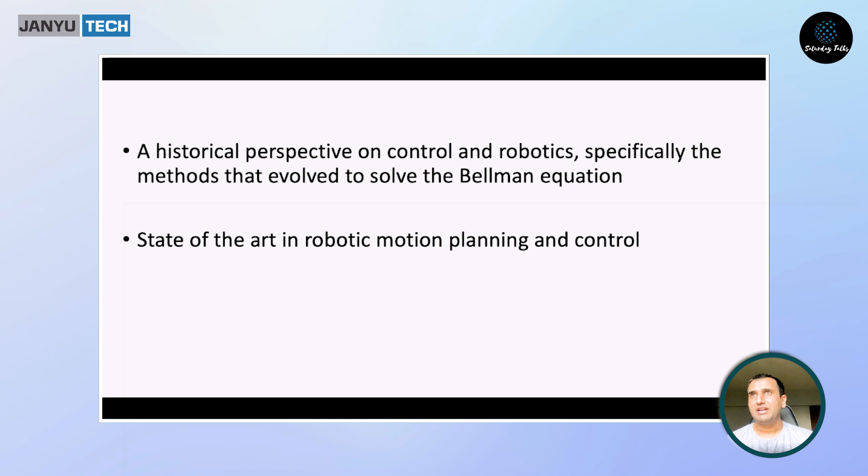For the rest of the talk, let's keep it informal. I'll walk through the slides, and if you have any questions, just ask me. The only issue is my screen is in full screen mode, so I cannot see if anybody raises their hand, so please feel free to stop me and ask questions. I may not be able to answer all of these since these are very deep waters, and there are areas I'm aware of and some that I'm not. Where I'm not, I'll tell you as much and direct you to the appropriate references. So with that, let's move along.

Let me start by telling you a bit of the history of how controls and robotics have been doing for maybe the past 50 years or so. With that, I hope you'll understand why the Bellman equation is now suddenly so front and center. In fact, more than the equation, I want you to think of the Bellman equation as a way of thinking about problems, and that will become apparent very soon.

The history of control, specifically what we call optimal control, really dates back to the 1940s with the work of von Neumann on what we now call game theory. But that work really laid the foundations for what we also now call dynamic programming. A lot of these ideas really started coming together in the 1950s. 1956 was really a pivotal year because four major developments happened at that point, which had far-reaching impacts on not just how we solve control problems, but importantly, how we think about control problems.

The first I've mentioned here, the Pontryagin principle and Bellman equation, relate very much to optimal control. Pontryagin's principle is a way to solve optimal control problems. In some sense, it is not the same as the Bellman equation, but there are some overlaps, obviously, because they both try to solve the same problem. Both of these were published in 1956, to be precise, for the very first time.

Now, for those of you interested in AI, you'd also know that this was the year in which the Dartmouth workshop took place, in which the field of AI was to some extent formally defined, as in people got together and defined what kind of problems or objectives would fall under the ambit of AI.

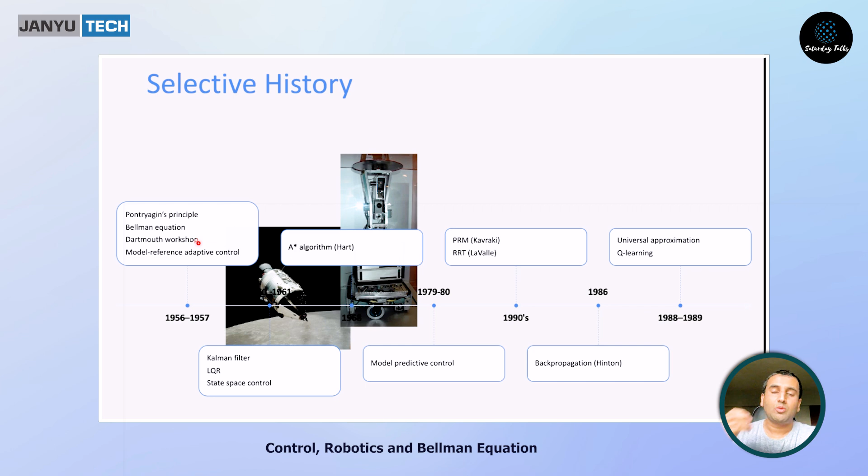Problems like planning, perception, decision making, and robotic path planning were formulated broadly as areas of interest to the field of artificial intelligence.

The last development that happened in '56, which is of particular interest to aerospace engineers, is model reference adaptive control.

The 50s was a time when combat airplanes started flying supersonic. The designs became more agile, and as the wings became smaller and the planes started becoming unstable, handling became a challenge for pilots. So it was felt you had to have a uniform set of handling standards, which came about in the 1940s in the form of what we now call handling qualities. But you also needed a control law or technique which could smooth out differences between different airplanes and different flight regimes, keeping a uniform handling standard across the flight envelope.

That idea of uniformity was captured in this reference model, and that gave rise to MRAC. These things happened in 1956 itself.

This was also a time when Rudolf Kalman was active as a researcher, and in 1960 and 1961 he published his now legendary papers - three papers in fact. There was a paper on what we call Kalman filters first, and a paper on Kalman-Bucy filters, which are not actually called Kalman filters because they differ in how you add measurement noise to the system.

Another interesting development was linear quadratic regulators, or LQR. I'll tell you how LQR came about as a result of Kalman's attempt to prove something about the Kalman filter - it's not like he was thinking of a control method, but he realized there's a way to prove how his filter works if he thinks of it as a control problem. That gave rise to LQR, and it's actually tied very closely to the Bellman equation.

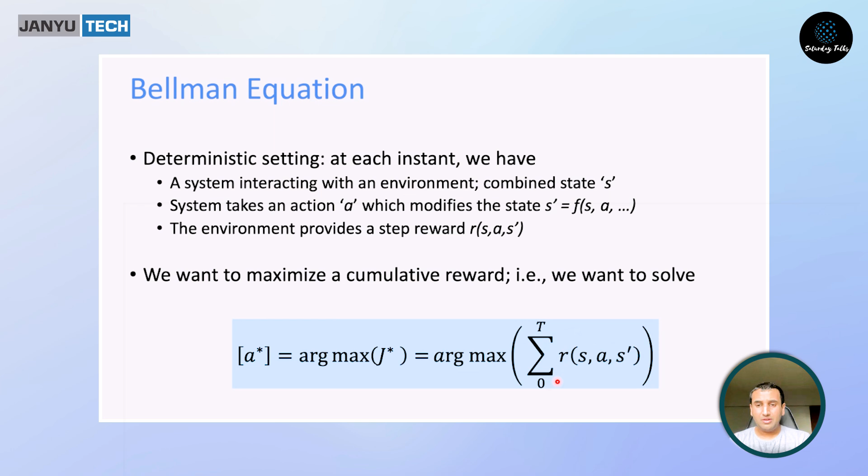What you actually want to achieve in all of these things is to maximize what you accrue over a long period of time, and that's what's written at the bottom. Starting from the very right, you sum rewards over a period of time from 0 to t. You want to maximize this total reward — you don't care about the step reward alone.

There are times when step rewards may not be great, but this entire reward has to be maximized. If you're a policymaker, what you care about is not what this reward is going to look like, but what actions you need to take to maximize this reward. Therefore we say argmax. We sometimes denote this reward compactly as J star, and what you want to solve for is the series of actions A star that are going to get you the highest possible reward.

This is a problem that you want to solve in any kind of practical setting. To go back to that example with the RBI, if they could, they would want to plan their sequence of interest rates for the next 5 years and bring some predictability into the market. In engineering, if a robot has to go from point A to point B, it's going to want to take actions that minimize energy loss and get it to that point in the minimal possible time. So it's the same set of problems being solved in all these different disciplines, and you see how nicely it already starts looking like a very unifying framework.

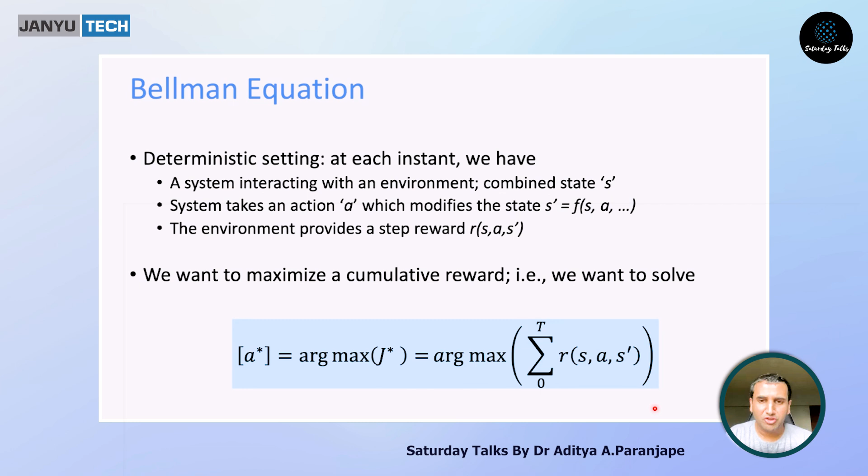All right, so let's move on. We're not at the Bellman equation yet, but this is the setting for the Bellman equation. Now there are some nice ideas here that help you actually get to the Bellman equation.

So let's look at just the cumulative reward now. Don't worry about the action just yet. Let's look at the reward that you get by taking some series of actions A from time 0 to t. Now, one key principle that was actually obtained not just by Bellman, but even by von Neumann before Bellman.

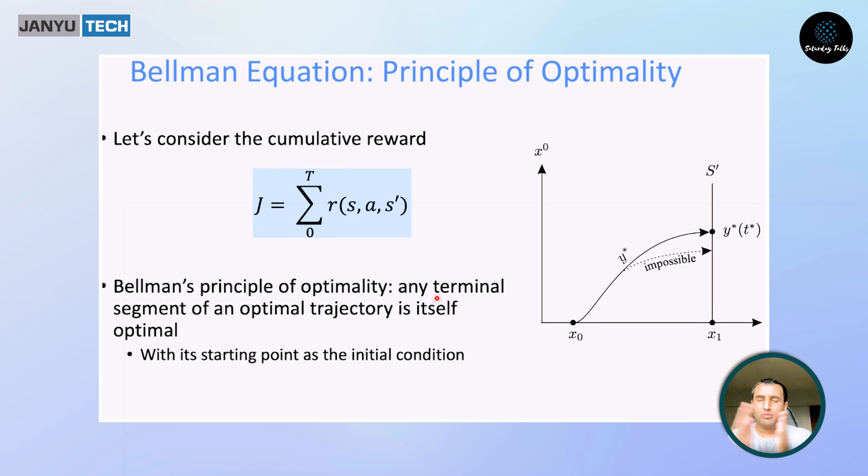So the way to think about it is, if I have an optimal trajectory, then between any 2 points on that trajectory, solving the Bellman equation entails solving this equation for all possible states. If you are thinking of this as a robotics engineer - I have a robot starting at some point, I have a terminal state in mind, and I'm going to solve the Bellman equation in its most native form - well, you're not going to solve for one initial condition. You're going to solve for every possible initial condition, and you're just going to cherry pick that one solution that applies to you.

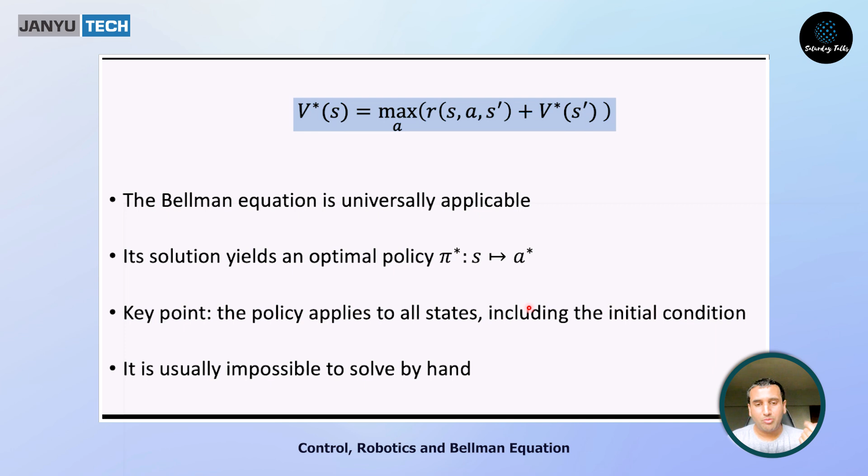And that already shows you that maybe this is an expensive process. It's also an inefficient process to solve this equation. So what you will see from here on, when we talk about robotics and control, is how methods evolve to solve this equation efficiently. In robotics particularly, initial conditions are typically known - you don't want to have to deal with every conceivable state. In control, the intractability is a problem, so you have to find ways to deal with this equation.

So that's what I'm going to show you about control in robotics. And as I told you earlier, this is not just an equation, it's an idea, it's a concept, and it's had a significant impact on how these two fields evolved, starting in the late 50s. All right, let's look at robotics now. I have a few slides on robotics, a few slides on control, and then I'll wrap it up. So it's maybe 10 more slides to go approximately.

In robotics, one of the key problems we deal with is motion planning. You will encounter both phrases, path planning and motion planning. The technical difference is that in path planning you're only worried about the physical path, the X, Y, Z coordinates. In motion planning, it goes beyond that to the trajectory, and really to every state of interest. So if it's an airplane or a satellite, even the rotational motion would be included in motion planning, whereas with path planning you don't care about those things. You don't want to solve for it, you just hope everything falls into place when you solve for the path.

The other important point is that the initial point is usually specified. Remember we talked about an optimal policy, and when you derive the optimal policy, even for a fixed terminal point, you derive a policy that applies to every possible state, which means whatever you solve for has to be solved for every possible state. You don't want to do that in a robotic setting. You don't have that kind of time or resources when using algorithms in real time. So you want to solve something that looks like the Bellman equation, but without all the complexity of solving for the entire state space.

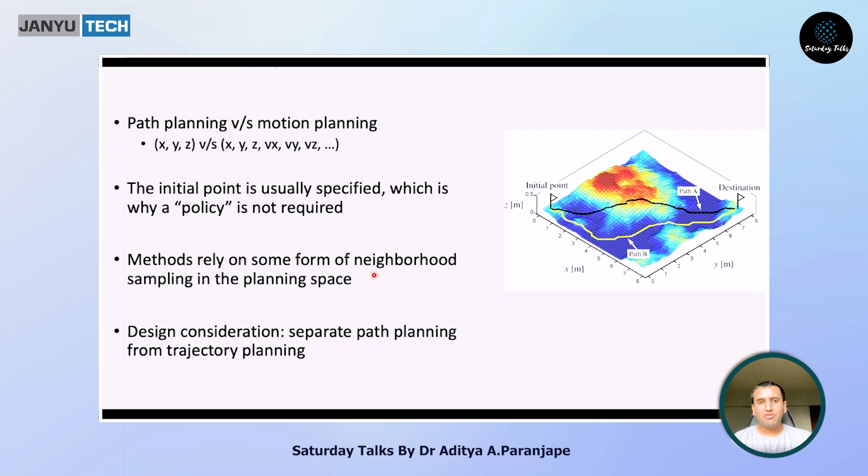So what's happened in robotics is that methods evolved which rely on some form of neighborhood sampling. If you're at some point, say the initial point, you sample the neighboring areas, you see what cost it incurs to get to those points, and you use a clever way to get an approximation for that cost to go. I'll show you exactly how that's done in A* in just a moment. These sampling-based methods evolved in robotics because of this idea of the initial point being more or less fixed. They're rarely used outside of robotics, but it's a nice way to solve Bellman's equation.

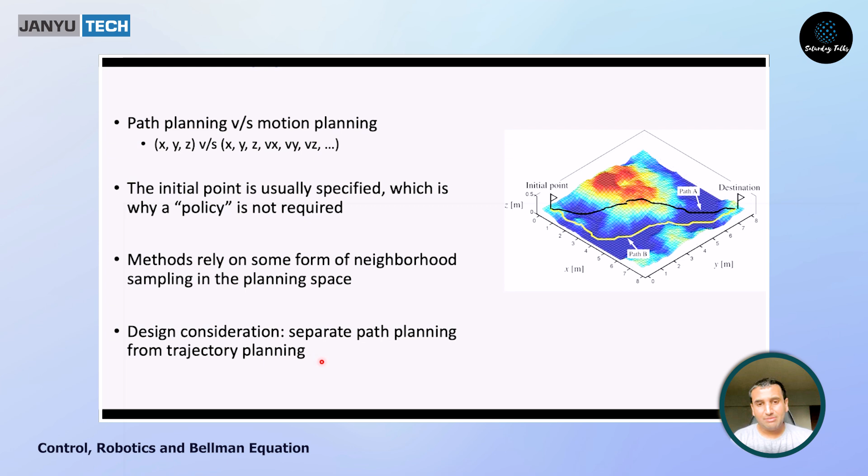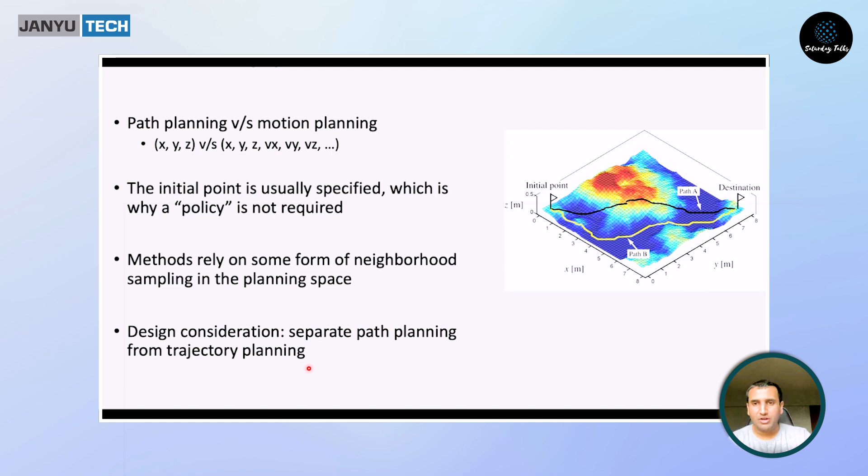For those of you who work in robotics, I know Janyu has a significant portfolio here, one consideration is whether you want to separate path planning from motion or trajectory planning. That's of interest because the methods I'm going to tell you about evolved to solve the big problem with path and trajectory planning together. But I'll show you examples where we separated these two, allowing trajectory planning to happen in a completely independent setup from path planning. Path planning was solved using Bellman's equation, but for trajectories we didn't do anything—we used a straightforward open loop stitching approach that you will soon see.

Now, I told you earlier about A*, and A* really evolved to solve Bellman's equation directly. So what you see in this sketch is A* in action. Let's just pause it for a minute if possible. Okay, it's not letting me pause—one moment. All right, but what it's doing is this: suppose you have a gridded world as shown in this video.

From every point, there are areas you can get to—those are the neighboring cells. There are some no-go areas which are black. Every hop comes at a price, and in this kind of world that price is uniform. You want to get from the starting point here to maybe the goal somewhere here in the minimal possible time, and you clearly see how this equation comes into being.

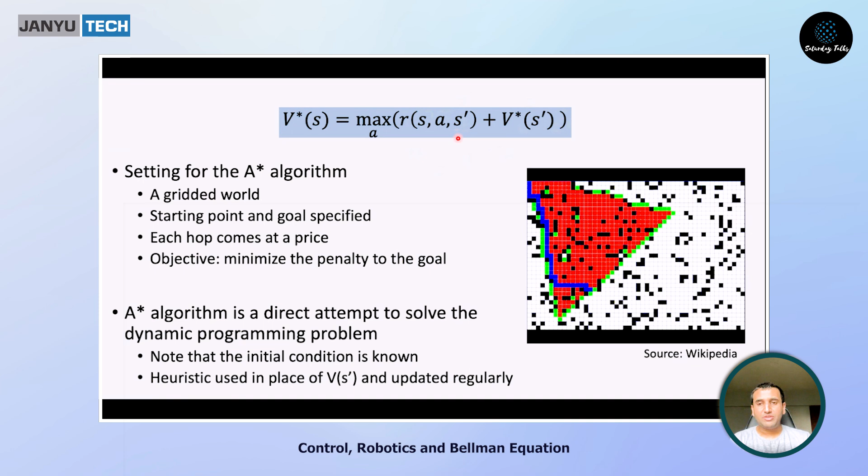The trouble is, when you start at a state S and take a hop, you don't know this value because you don't know the value function at all in this case—all you know is R. So what A* did was come up with something called a heuristic. Those of you who've worked on A* know this, that we create a heuristic function that approximates V.

As you take a step forward, you update the heuristic for the state you've just traversed at every parent state of that state. So if, after a few hops, I end up in one of these states, I update V* of that state, and using the same formula, I go back and update V* for every state I've visited previously. I keep doing this until I get to the goal state, and once I'm at the goal state, its own V* is 0. Because of this approach, I've actually been updating V* for every state.

That's it. I have V* now, and I know my optimal path as a result. This was the first algorithm, developed in 1968, and that robot I showed you earlier, Shakey, actually used this algorithm to traverse a gridded world. So the very first systematic motion planning algorithm came about as an approximate way to solve Bellman's equation.

Now, while A star is quite good, the idea that you have a gridded world can be a restriction. Our worlds are not gridded. I mean, we can have road maps, but our real world is not gridded. So that gave rise to the idea of what are called probabilistic road maps. The idea was, how do you extend A star to continuous spaces?

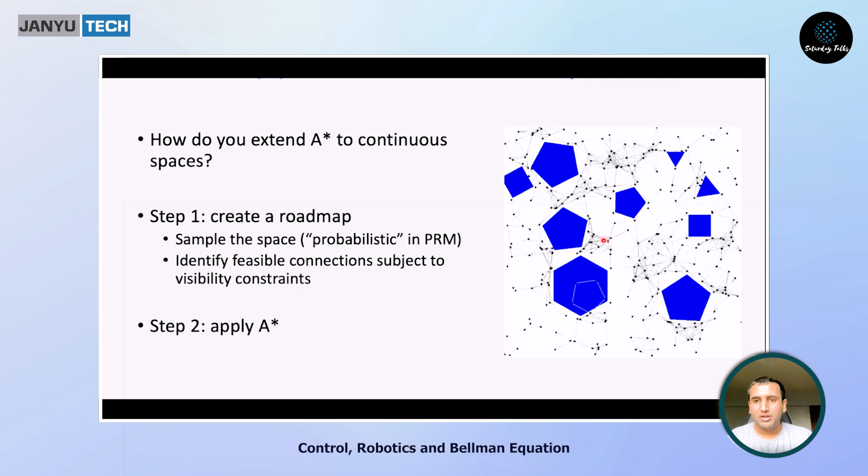If, on the other hand, you have applications like Uber, where you go in a city where the roadmap already exists, it's perfectly fine to use PRM — it's very powerful. But if you have a robot that's just asking for a route between one point and another, a single query with no guarantee such a thing will be used again, then PRM and even A star are both overkill.

So that leads us to the next method known as RRT, or rapidly exploring random trees. It's a single query algorithm, meaning you give it an initial condition once and tell it where you want to go once. It samples the environment in real time, looks for feasible connections, and builds a very special graph.

What you saw up until now was a generic graph with no structure to it. This one builds a tree, which means that if my tree ends up on the goal node, all I have to do is start from that goal and go back down the tree. There are no cycles in trees — there's a single path from the goal to the initial condition, and that's it. It has been solved for; nothing else remains to be done.

So RRT has actually evolved into a fairly strong approach. It's very practicable as well, and in fact it is the state of the art. Let me show you an example that comes from our own research — these examples are drawn from our work.

We were able to implement RRT online on a computer that sat on an airplane — a Pixhawk board with a minimal computational architecture — and we were able to implement it. Let me see if I can play this video for you; one moment, I'll probably need to use my pointer. You can look at the kind of maneuvers the airplane is doing — these are very aggressive maneuvers.

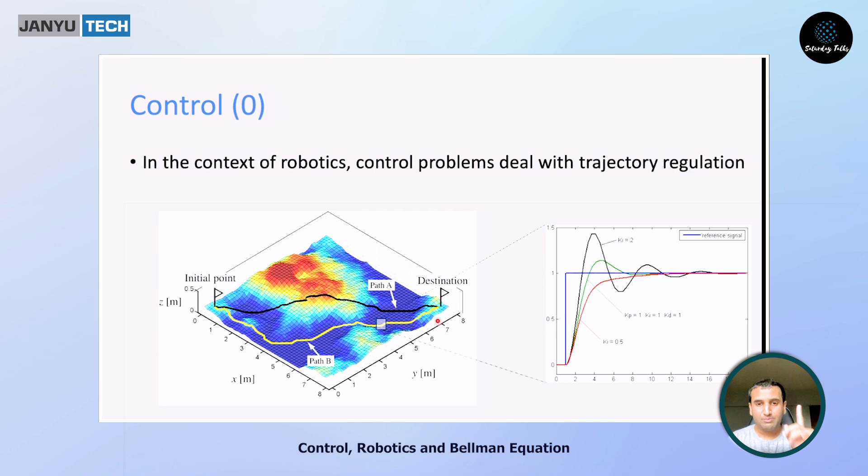Now, the reason why I mentioned this is because although we talk about the Bellman equation, we talk about long-term problems, the way I've explained the control problem, it appears to be a relatively short-term problem, right? But despite this being a short-term problem, we still use something like Bellman's equation, because Bellman's equation gives us a policy. So although control problems may have objectives that shift from point to point, my policy doesn't have to shift. Unlike the planning problems you saw in robotics, where we didn't care for a policy—we cared for one specific solution—in control, we care for a policy, at least ideally.

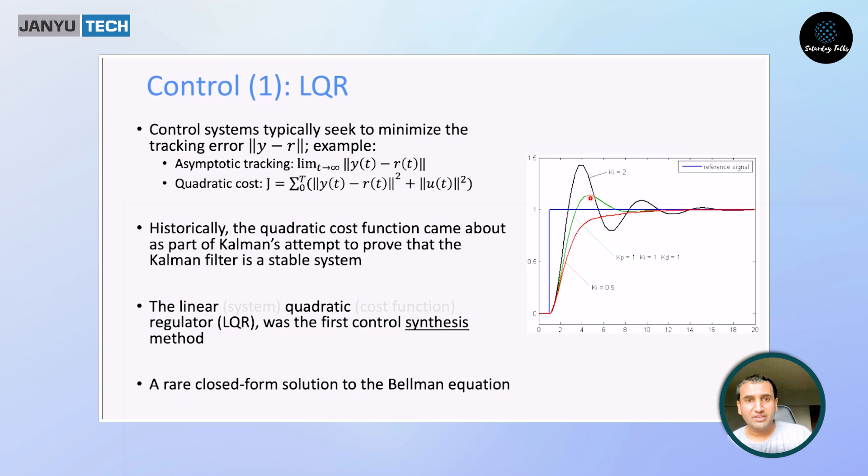So in control, as I told you earlier, our typical goal is minimizing some tracking error, the difference between the output and some reference signal. More often than not, what we care about is this thing called asymptotic tracking. You start with whatever error you have initially, and as you see in this figure, you hope that it dies down gradually. In piloted flight, as the question earlier hinted, these characteristics become important—you don't just want the error to die down, you want these transient characteristics to be chosen correctly.

And the optimal control formulation that we've seen so far, in terms of the reward, does nothing to deal with the handling at all.

As I told you, when Kalman was working on Kalman filters, he realized there was some reason why you might want to use LQR, and in fact he devised it as a solution to a problem. So you have this kind of quadratic cost: the tracking error squared plus the cost of the control input squared, and you want to minimize this quadratic cost. Typically these two terms are weighted against each other, so the weights are not exactly one as shown here.

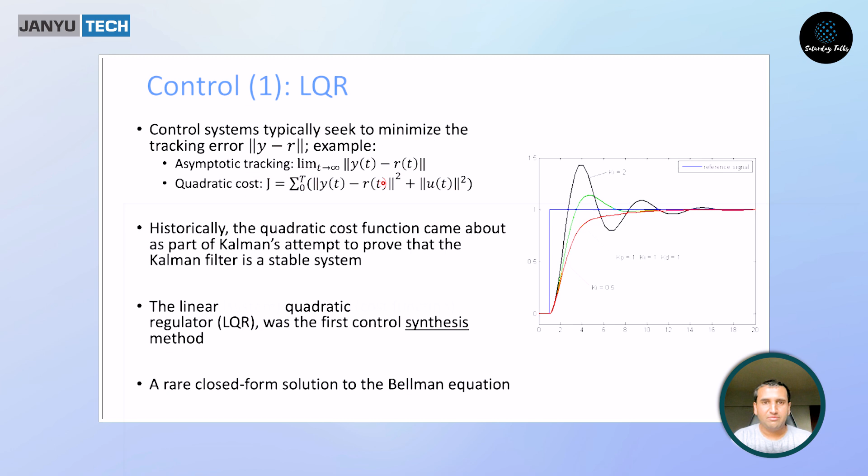Now, the trouble with LQR is it only deals with linear systems and quadratic costs, and it gives you a solution by hand. What happens if you don't have a linear system or your cost is not quadratic? You can still use an exact solution for very trivial cases, but generally it doesn't work. That's when MPC was devised towards the end of the 70s by the oil and gas industry.

If possible, you update information about the system. So if you have information from your sensors about the state of the system—for example, the temperature in your column distillation units, about pressure in certain areas, if something has failed—you can update it at the start of the prediction horizon and then compute this solution and let it run only for some time. You don't run through the entire horizon; you run through a part of it, typically a third or a half, and then you repeat this process, continuing ad infinitum.

Now, what have you done? The first thing is that you've made the problem computationally tractable. Instead of solving the Bellman equation over a long time horizon, you're solving it over very short time horizons instead. The second thing you've done is given yourself the ability to deal with uncertainties in the model.

The trouble is the Bellman equation requires that you know the model—there's this function f which maps your current state to the future state. We never saw it explicitly in the Bellman equation, but you need to know it to solve it in some ways. MPC took away some of that pressure because it says, well, I only need short-term knowledge, which I can safely assume I have. I don't need to know what's happening in the long run. So it allowed your procedure to become adaptive in nature.

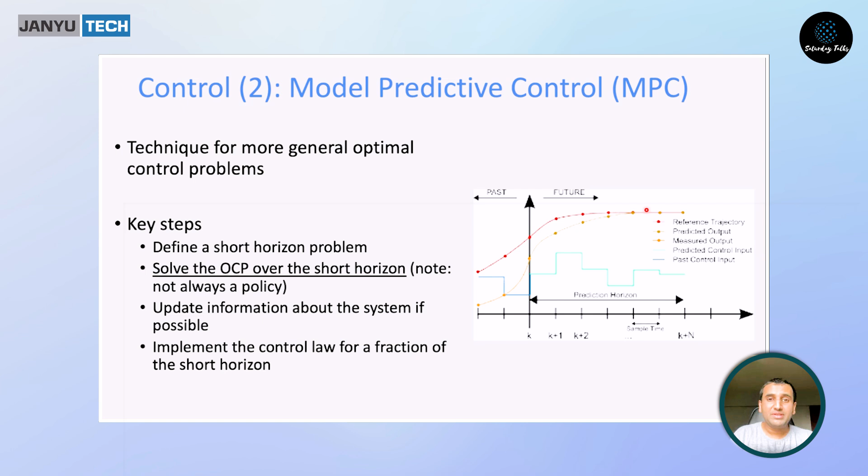That's what MPC achieved, and of course MPC is now state of the art with one or more variants. But again, MPC still requires that you know the system, even if only for a short time horizon. What happens if that's not the case—if your system is only available to you, for example, as a black box simulator? That's where reinforcement learning came in. So unlike LQR, where the system is linear, and unlike MPC, where the system is known, you now want to solve general optimal control problems for poorly known systems, where analytical solutions don't exist and heuristics don't work satisfactorily.

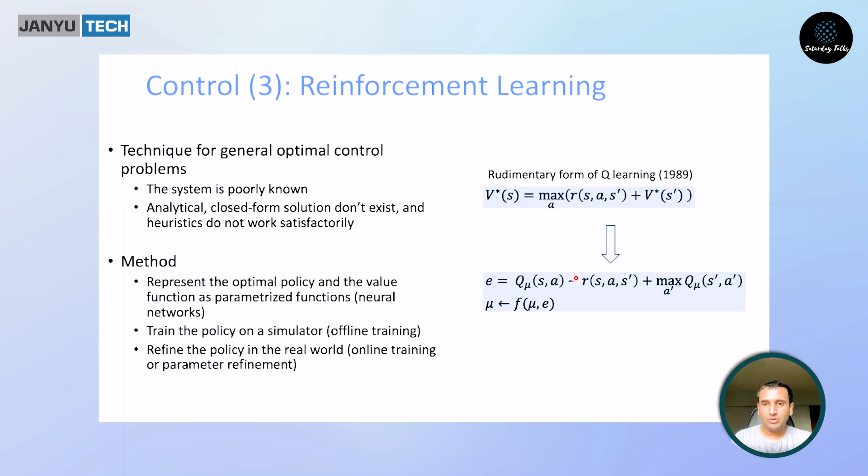There's a lot of extra detail in here which I've not gone into, but we don't even need to know that at this point. So really, reinforcement learning came about as a series of methods to simply solve the Bellman equation. Now it's a perfectly mature area.

Okay, there are well-known toolboxes in control, including in RL. But what are the challenges there? These are all state of the art, by the way. As you just saw right now, you still have to develop good quality models if you have to apply any of these methods.

Another challenge which we've not addressed yet is safe learning, and what makes it a challenge. Transfer learning is being addressed - I wouldn't say it's an open problem, maybe not conceptually. Safe learning is still a relatively conceptual open problem. And the other problem that you have is on optimality.

You're trying to solve Bellman's equation, and what you hope is that any method you use actually gives you the solution to the Bellman equation. But these methods very often don't do that. You don't know the system, so you're solving for an approximate solution.

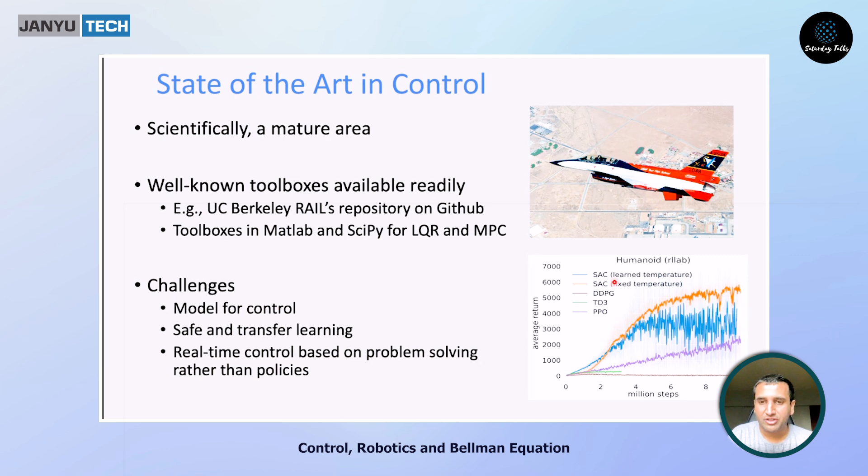This is a plot from a paper which first introduced SAC, one of the methods - it's called Soft Actor Critic. It wants to compare itself against 3 other methods, and you see 5 curves here. What is interesting - never mind which method outperforms which - notice the difference in the performance.

One method gives you a return around 300, 400 units. Some other methods are able to do it over 5,000. When these methods came about, they were all state of the art. They are all trying to solve the same problem, but neither of them guarantees that it's actually solving the problem perfectly. This is an inherent challenge in reinforcement learning.

In this case, you see SAC outperforming everything. SAC here, the blue and the orange lines, outperform purple, which is PPO, or proximal policy optimization. They outperform green, which is TD3 - I don't remember what TD3 expands to. And it outperforms DDPG. Whereas in the previous example that I showed you from our work with the industry, DDPG did much better than SAC.

So it tells you that there are risks inherent in applying RL. So you have to be a little cautious. Yeah, it's mature, there are toolboxes, but these guarantees on optimality don't still exist. So that's really an open problem right now.

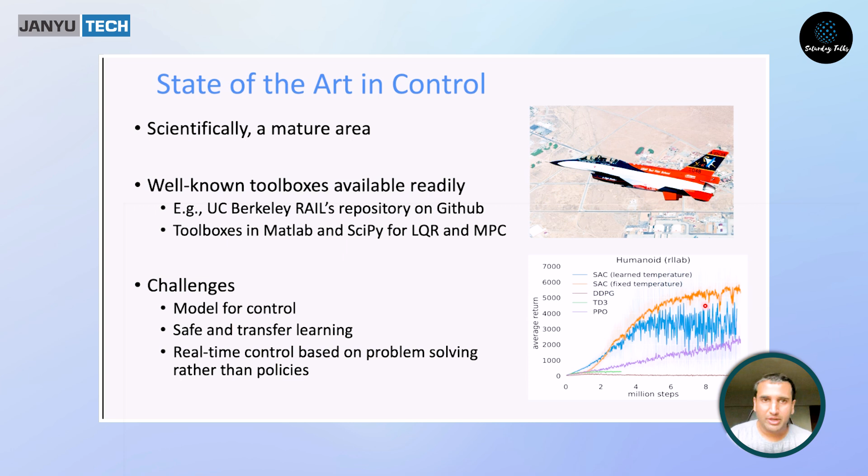So a quick summary now. You've seen now how the Bellman equation leads to a lot of the state of the art in controls and robotics. All of the problems we've looked at are fundamentally planning problems - planning over long horizon and control over short horizons, control with a policy. These are all fairly mature at this point, but there are challenges. I just showed you what happens because you can't prove optimality with some of these methods.

There are also issues with real-time computation, and safety can actually be a substantial challenge because some of these methods don't by themselves guarantee safety. You have to build it in some other explicit manner.

Now, I told you at the very outset, and I'll close with this, I'm mindful of the time. I told you at the outset that in control, we are used to thinking of policies as the way to go, but we are moving away from that. So what's happened now is that with computation becoming faster without actually adding weight to your processors, the thought process now shifted to: can we solve for the control actions in real time by solving iterative problems?

So every time you solve, for example, a linear programming problem, even something as simple as an LP, it's iterative. If you try to describe the operations, you have to run some operations over and over again until convergence, right? There was a time when this was not possible, and that's why there was so much emphasis on control policies, but that has now shifted to the point where we can now genuinely do real-time computation on board.

It's anybody's guess how effective it will be, whether the industry will absorb it at some point. At this point, we are not there, but this remains an open problem.

I thought I should talk to you about these because Janyu, I can see, is doing really well with robotics. You are developing great robots, but I think if you look at all of this technology, it's not just a way to solve existing problems - it's a way to actually take your robots to the next level. Each of these technologies would enable new problems to be solved. They allow multiple robots to work together, and they allow robots to function efficiently. I think this is where it would be great if the company now starts investing more time and more effort on absorbing these technologies. I'm pretty sure you're doing some of it already, but it would be great to see the company taking the role of a leader in developing this kind of technology as well.

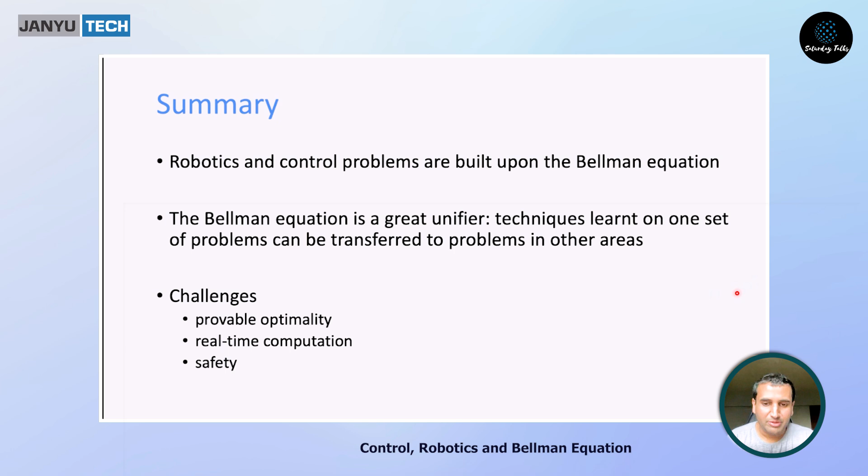Hi, Aditya. This is Arun.

Quick question. You talked about reinforcement learning application in the oil and gas industry. Was there any attempt at digital twin modeling and then improvement of your RL?

Okay, that's a good question. So that particular engagement had a digital twin component. However, that's not what we developed RL for. So we had a very interesting situation. That digital twin for that refinery was available as a service from a complete third-party provider, and they weren't prepared to divulge what was in it. So they weren't even—it's funny.

Imagine a provider like ONGC—this project wasn't with ONGC. So somebody develops a simulation model for the ONGC refinery that's validated by ONGC. Now ONGC wants to optimize its operations, and they say, well, you can use that simulator, but nobody has access to what's in it. So yeah, we had a digital twin, but we didn't have access to what was in that digital twin, which is why RL became essential. All that we had a sense for was the state space of that digital twin, nothing else.

What happens very often is people who develop digital twins are maybe a slightly different community. They specialize in that domain, whereas people who do things like RL or control specialize in those areas. As somebody who works on flight control, I've had to straddle both, trying to understand flight physics but also control. That obviously means we spend a little more time developing what are called models for control. More than a digital twin which has very high fidelity, what you really want is a model that does the best for control design.